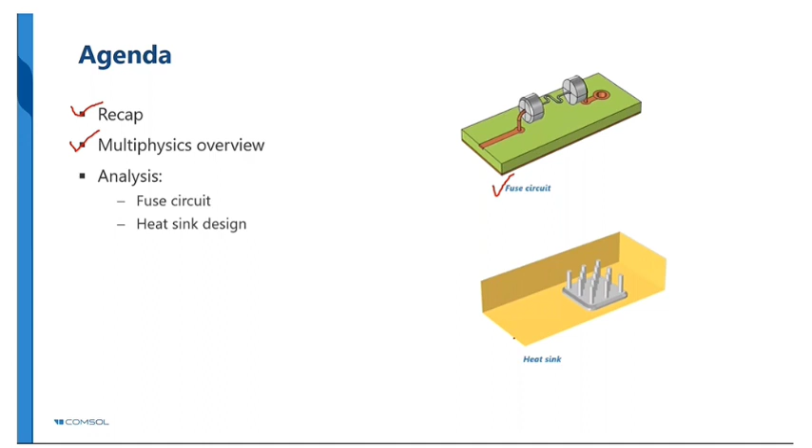So let us talk about the agenda of today's session. So the first thing is we'll go through some of the recap. We have already shared you the COMSOL Learning Center videos. So we highly recommend that you go through those videos because that will help you to learn the basics, so that when you come over in the session for the training, you would be able to perform the analysis. And we will give some introduction to how to do multiphysics analysis. Both the examples that we will do today, fuse circuit and heat sink, are based on multiphysics analysis.

So these are some of the prerequisites that we expect you guys to do. Watch these videos, CLC videos. These have been already shared with you. So I will suggest that if you have not seen them today, by today night, or by tomorrow early morning, you can do this, and you can ask more questions during the one-on-one session tomorrow. So these are the part of the recap that we have already shared with you guys.

Okay, so let me give you the brief introduction to COMSOL Multiphysics. With COMSOL Multiphysics, you can individually perform the physics like electrical, structural, acoustics, fluid dynamics, heat transfer, or chemical. In addition to it, you can perform coupled physics. For example, you can couple electrical and structural mechanics, or you can couple electrical with heat transfer. So there is no limitation on the maximum number of physics you can couple. So you can couple n number of physics together.

There are inbuilt physics interfaces available which perform the multiphysics coupling, but in addition to it, you can also write your own manual coupling approaches. You also have the equation based interfaces where you can write and solve your own equations in addition to the pre-built equations of each and every physics. You can also perform optimization, let it be shape optimization or geometry optimization. You can also couple your model with any third-party tools such as MATLAB, Excel, CAD tools like SolidWorks, AutoCAD.

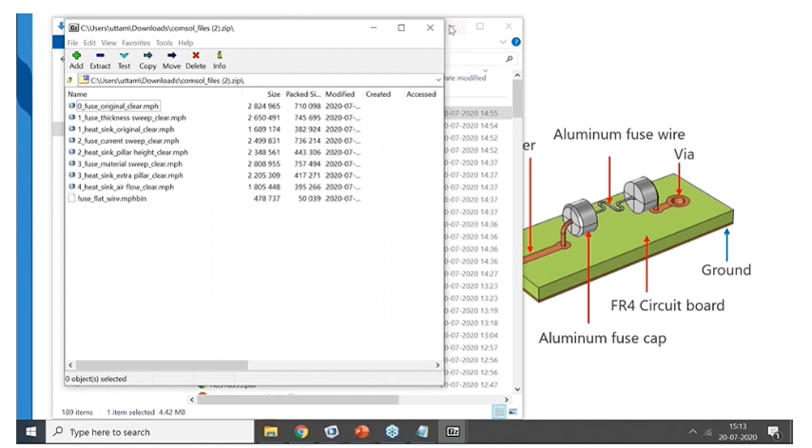You can see in your GoToWebinar window, there is a handout section. In that handout section, you can open the model files .pdf. Just click on that model files.pdf, and once you open it, there is a zip file, and once you download the zip file, there are around 7 to 8 model files available. Okay, and once you download the zip file, it will look like this. So this is the zip file contents, right?

So you need to use this fuse_flat_wire.mph bin file. So we're going to use this mph bin file. So can you just download the handout section and just unzip the files so that you have this fuse_flat_wire mph bin file with you.

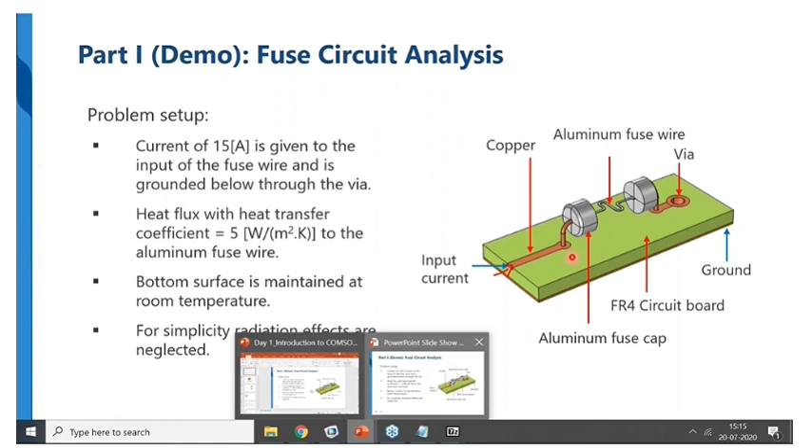And then, as you already know and have already answered, there are three physics that we are going to solve, or just two physics to start off with: electric currents and heat transfer in the fuse wire. So in that case, what we will do is start this process step by step.

We will only run electric currents first. We will see the currents within this system, and once we are confident of the results with the electrical circuits, we can then go ahead and couple the losses into the heat transfer part. So let us go to AC/DC, Electric Fields, and add the Electric Currents interface.

Okay, just click on Add. So we'll wait a few seconds for you guys to add the geometry, that is the 3D geometry, and then the Electric Currents interface. Let me know if you face any concerns till now.

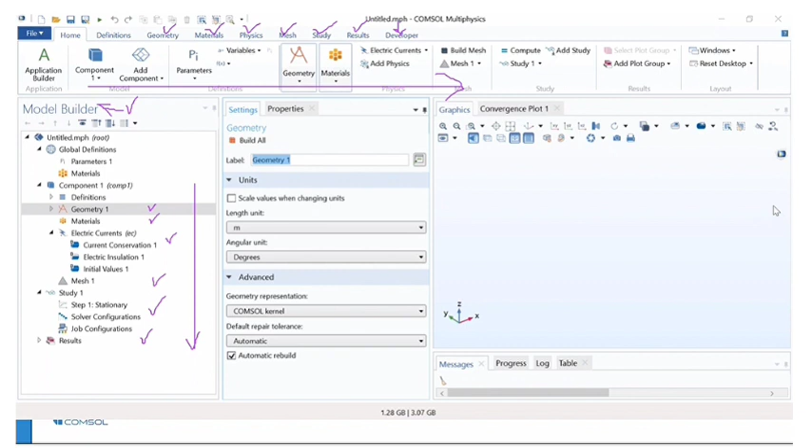So right now, you guys have not opened any files. You just need to open COMSOL Multiphysics and follow the model wizard steps.

Go to file, new, model wizard, 3-dimension space. I use AC/DC, electric fields and currents, electric currents. Go to study, stationary study, and that's it. So we have not added any file as of now.

Once we complete the model wizard step, the first thing we need to do is add the geometry first.

So how do you add the geometry? If you have skipped some steps, I suggest you go through the recording because this session is completely getting recorded. So the first thing is to add the geometry. What I will do is right click on Geometry 1 and click on Import.

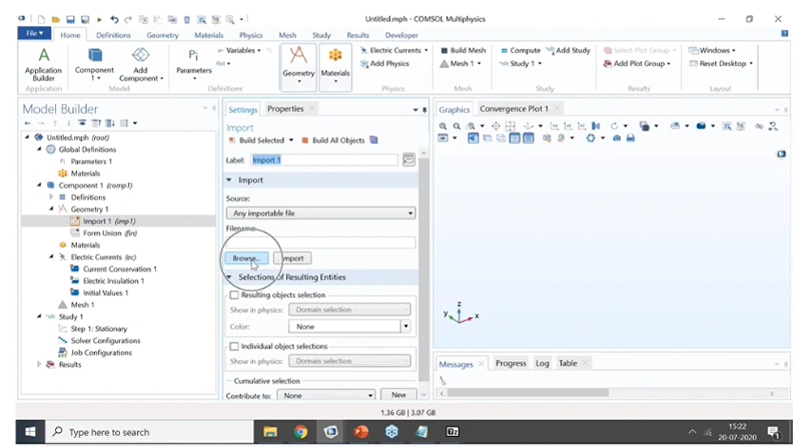Over here I can just click on Browse and select the model file. This is the model file, fuse_flat_wire.mphbin. Double click on this - it's available in the link we shared with you - and click on Import. I will wait for a few seconds for you guys to add or import this geometry.

There are a few questions like how is this geometry made. This geometry is made in COMSOL only, but to save time, we are not going into the steps involved in making the geometry. We are just trying to import the geometry and do engineering analysis. Day one is to have a glimpse of COMSOL Multiphysics, to get the flavor of how to do multiphysics analysis in COMSOL.

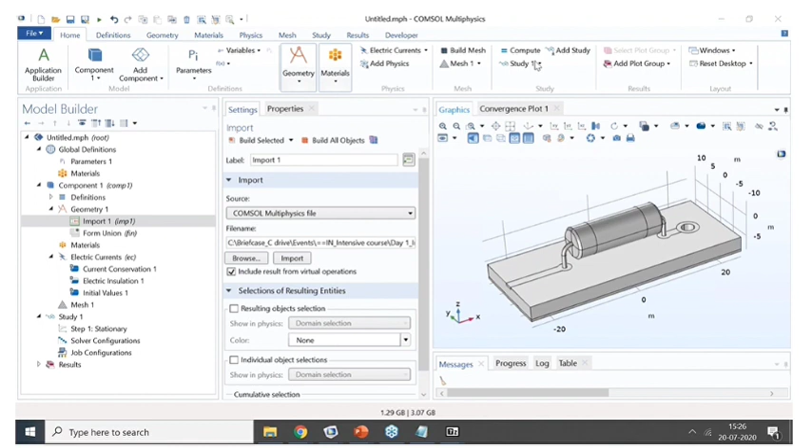Now, for example, you want to select some domain or boundary within this geometry, which are internal boundaries. For that, you just need to make this wireframe rendering, then point your mouse on top of it and use the scroller. Usually you put your mouse on top of it like this, and then use your scroller to move further - like this, you can actually choose any boundaries which are internal boundaries, not external boundaries.

Either you use the scroller, or you just point your mouse on top of the domain you want to select and use your up and down keyboard buttons, like this, and then whichever boundary you want to select, just left click on that. This is how you need to select the internal boundaries.

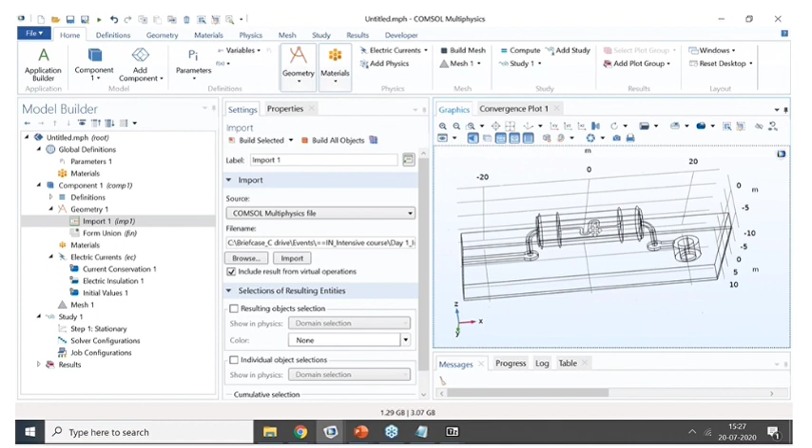This is not required as of now, but there was another question. If you right click on the geometry and move, you're able to pan your geometry, as you can see. If you left click on the geometry and move left and right, top and bottom, you're able to rotate your geometry. If you press your scroller button and move forward, you're able to zoom in, and if you move back, you're able to zoom out. So these are the three basic functionalities of using the graphics pane in COMSOL.

Let me know if you're facing any issues doing any of this. I'll wait for a few seconds for you guys to get a hang of it. So if you just left click on the graphics pane and move forward and backward, right click on the graphics pane to move or pan, and then use the scroller to move forward and backward.

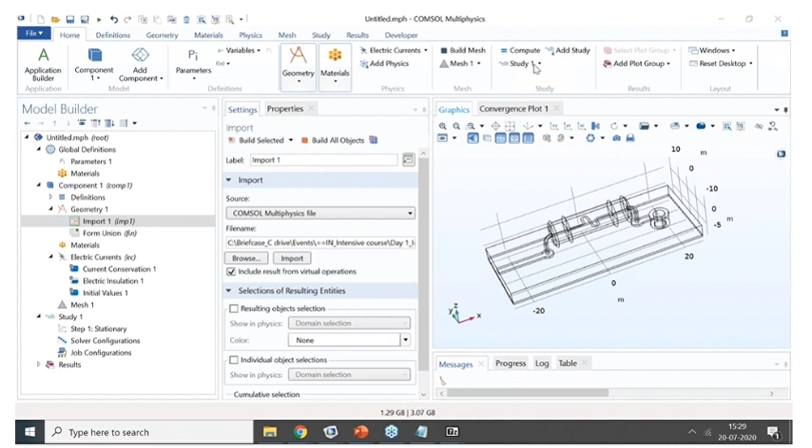How to select individual domains? I will come to that in some time. Selecting individual domains, individual boundaries, everything, how to select them. As of now, you can just learn how to move your geometry back and forth, move forward.

For people who are stuck at the geometry, just right click on the geometry. Once you're able to complete the model wizard, right click on the geometry and import. Once you click on import, go to browse, choose this fuse_flat_wire.mphbin file, double click on it, and then click on build all.

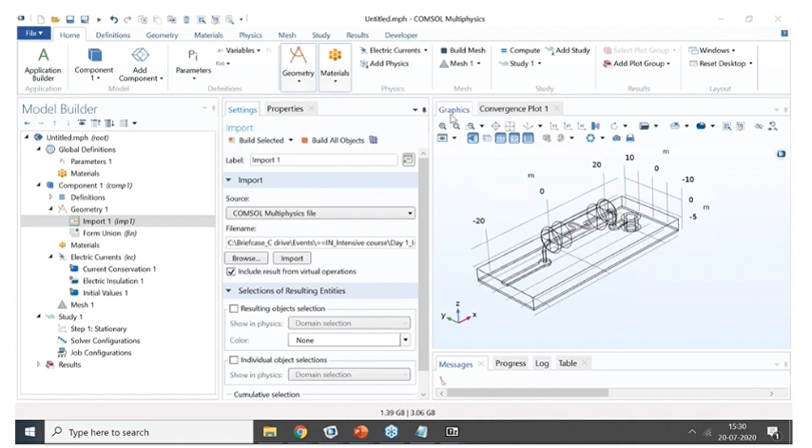So now the thing is, if you zoom into this boundary of the aluminum, it is only a boundary. So I want to now extend this boundary using the extrude operator. So how do I do that? Just right click on the geometry.

There's one more thing that I need to do. If you left click on geometry one, the length unit, you can see that it's in order of meters. You don't have a fuse wire which is in order of like 50 meters. It's from -20 to +20, around 40 to 50 meters. So you need to change the length unit. Just left click on geometry one and change the length unit from meter to mm.

I'll wait for a few seconds for you guys to do this. Change the length unit from meter to mm, and then build all. You see that your dimensions are now in order of mm. If you have missed any of the steps, you can see the recorded videos that we have. Once you are done with changing the length unit from meter to mm, the next step is to extrude your geometry.

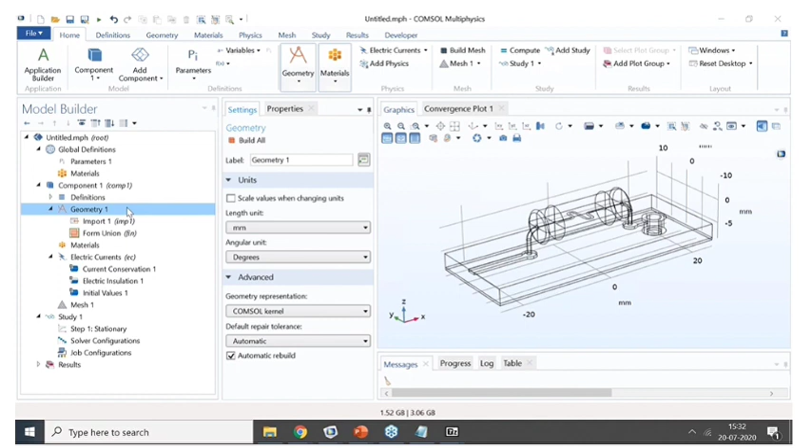I hope you have changed the length unit from meter to mm. Now just right click on geometry one and click on extrude operator.

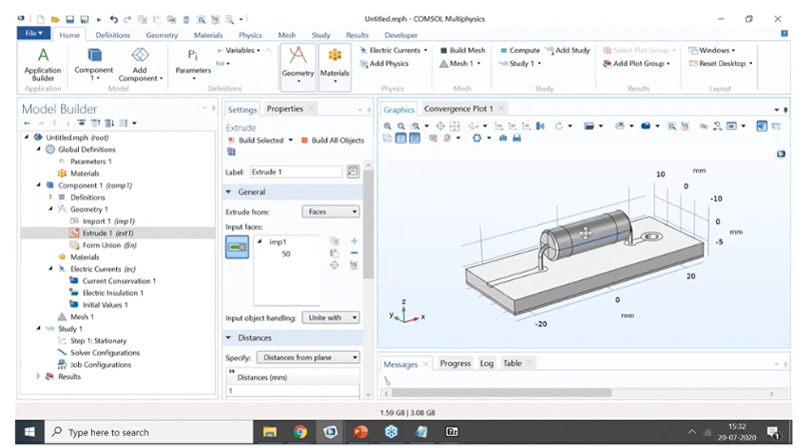And then you choose this boundary over here, just left click on this boundary. For this you need to enable the wireframe rendering. If you don't enable wireframe rendering, you cannot select this domain or boundary. Just enable the wireframe rendering, and then select this boundary over here. How do I select it? I just use left click, that's it.

And in the distance over here, I write 'thickness'. If I write thickness over here, this is going to give me a red symbol. So I will go into the parameter and write thickness equal to so and so mm. I'll wait for a few seconds for you guys to use this extrude operator.

I think you have added this extrude operator over here. This parameter thickness, I'm going to write in the parameter one as again the thickness, as 0.1 mm. While you define the parameter, the name remains the same, the expression is like 0.1 mm. That is 0.1 is the absolute value of the thickness, and the square bracket is the units. The units are always written in square brackets.

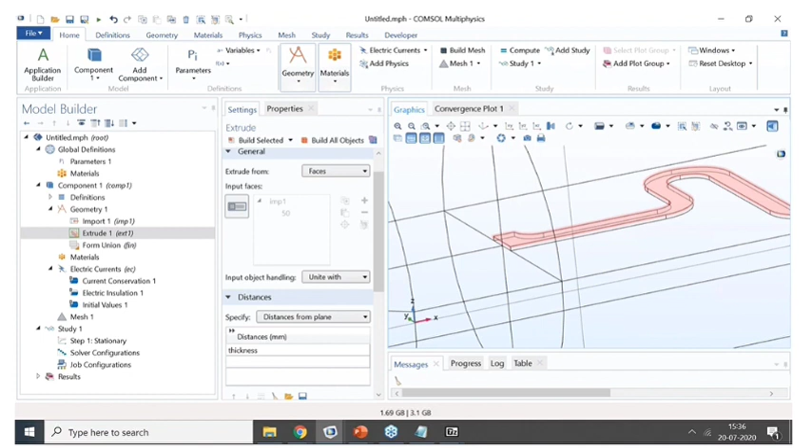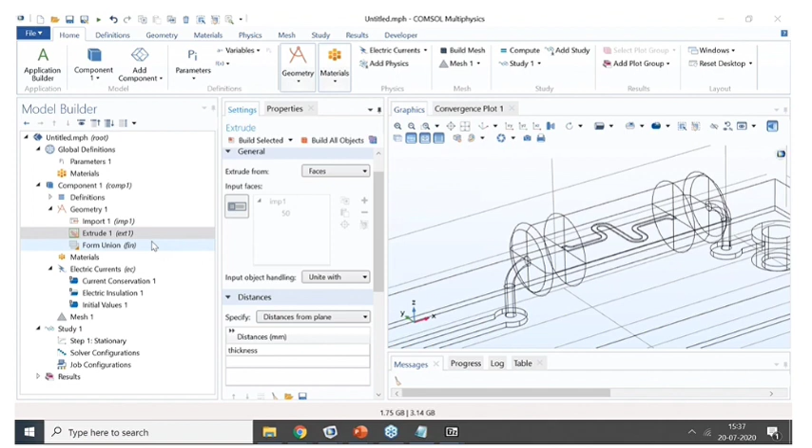So let me know if you are able to do this step. Any concern, any issues if you are facing to do this step. Wait for a few seconds for you guys to add this extrusion. Let me know if you're able to perform this extrusion, any issues are you facing, if you're able to extrude this boundary.

Uttam, sorry to interrupt. There are quite a lot of people who are not able to do the extrude operation. Can you please repeat it? Yeah, yeah.

So what I will do, I will just delete this extrusion. Now I go to the basic, that is only a boundary. To extrude, I just right click on geometry one and click on extrude. So once I click on extrude, I need to then select which face I want to extrude. So I just select this face.

And once I select this face, the distance I need to mention is the thickness that I have mentioned, the parameter as 0.1 mm, right? And then I click on build all. I'll wait for a few seconds for you guys to add these steps.

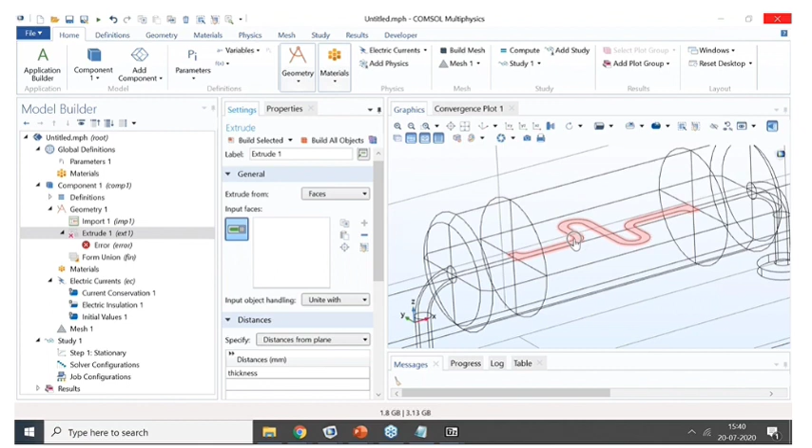So if you don't select any of these boundaries and click on build selected, then it will ask you to provide input entities. In that case, you need to enter this face. Just make this selection button on, click on the face that you want to extrude, and then just click on build all.

Once you've written thickness over here, you need to also write the thickness in the parameter section: thickness 0.1 mm. So let me know if you're able to add this extrusion, and any issues you are facing, so that we can proceed further.

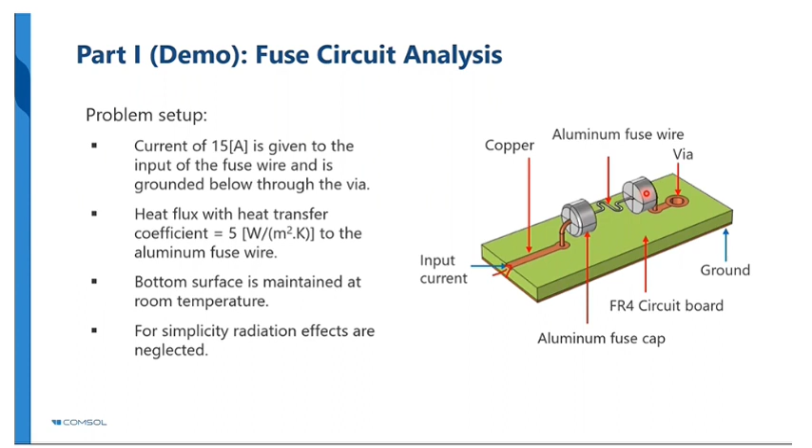Yeah, looks good. Many people are able to add this. So now the next thing is to add the materials. You can see that the copper is made of these domains, then you have dielectric in the center domain, and then this is the aluminum domain. The first domain that you add to your geometry is the domain which has the maximum number of elements. In this case it's the copper.

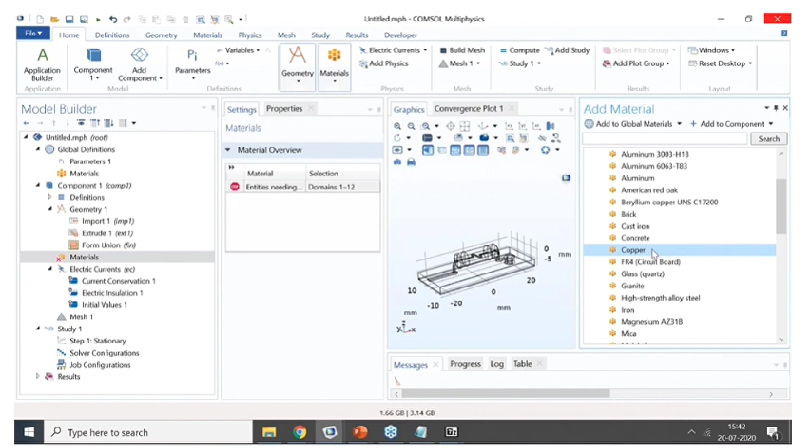So just right click on the materials, add material from library, go to built-in, and go to copper. Just double click on copper, and you will see that all the domains have been assigned as copper. That's what we want as of now; we will see what to do next. We'll wait for a few seconds for you guys to add this.

Once you've added copper, the next thing is that you need to add the aluminum fuse wire. Just double click on aluminum, and once aluminum is added, select these three domains. To select the inner domain, you cannot just left click on it, because the outer domain will get selected. So you need to move your scroller forward and then left click.

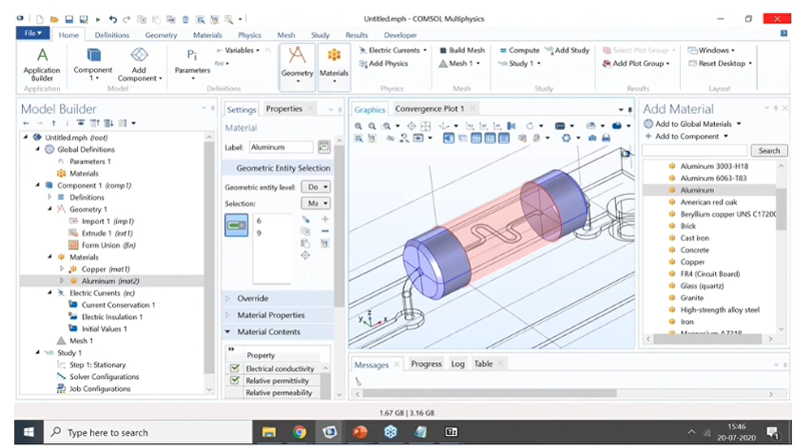So I will show this again. I will just remove all the domains. First, click on the left domain, then on the right domain, and then put your mouse on top of the domain you want to select, and use your keyboard up arrow to move forward and backward. You need to use the wireframe rendering, please do not forget that. Use the up and down arrows of your keyboard, or roll your scroller forward or backward.

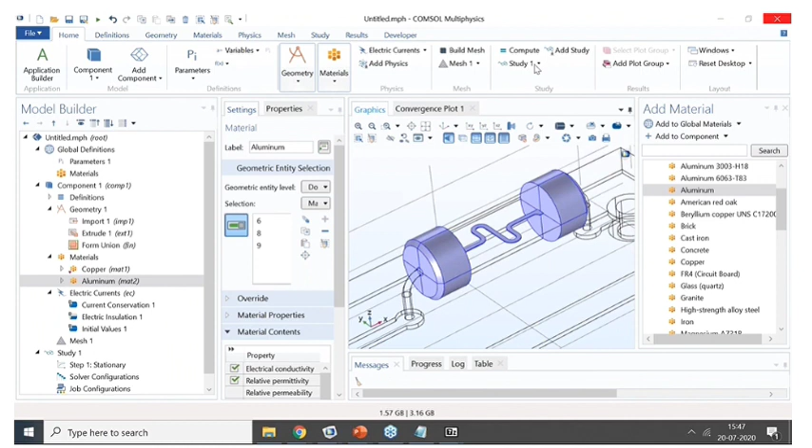Red means that it is yet to be selected. But if you click on it and hover your mouse on top of it, and it's showing green, that means the domain is selected. These three domains are selected. Let me know if you're able to add this aluminum domain, any issues or concerns, so that we can proceed forward.

So one of the questions is, we have already assigned the copper domain to 6, 8, 9, and we are now assigning aluminum to this. Is the copper domain being overridden? Yes, it is. If you go to the copper, you see over here 6, 8, and 9 are being overridden.

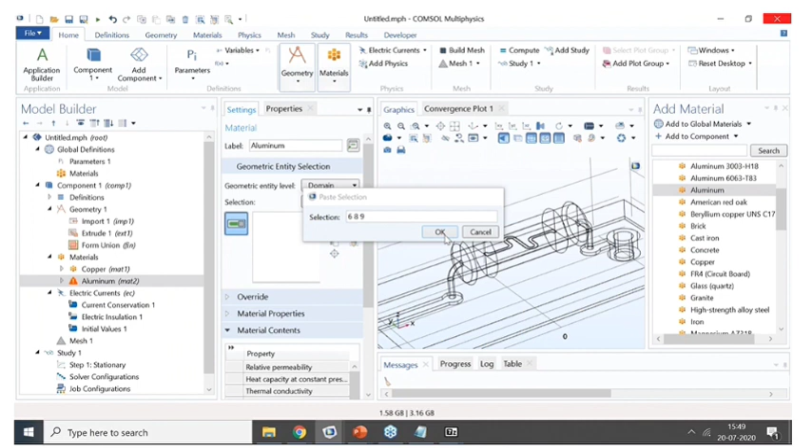One more way to select this domain, if I click on clear selection, if you are still facing concerns selecting the domains, is to click on paste selection and write the domain numbers 6, 8, 9. Okay, looks good.

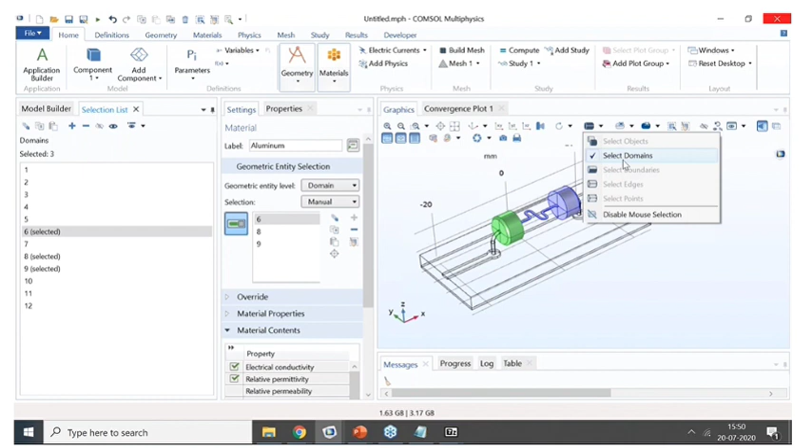One of the questions is, how do we know these domain numbers? Go to home, and on the right side there's a Windows section. In the Windows section, click on selection list. In this selection list you can go to domains, boundaries, and edges, and you can see that all the domains are numbered. You can choose whether you want domains, boundaries, or edges. Okay, looks good.

So now I have assigned the copper domain and the aluminum domain. The next thing is the dielectric domain. So I just right click on the air domain, add material from library.

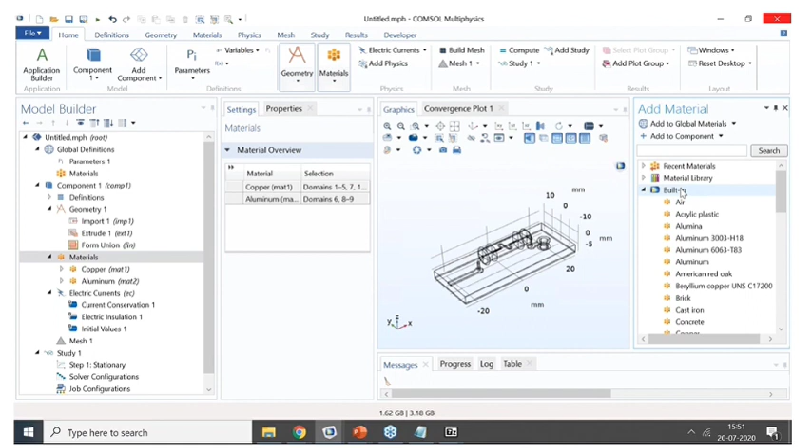And I go to built-in, and I select the FR4 circuit board. Okay, so in the built-in, all the materials are available. You don't need to search anywhere else. In the built-in, go to FR4 circuit board. Just double click on this and select the domain.

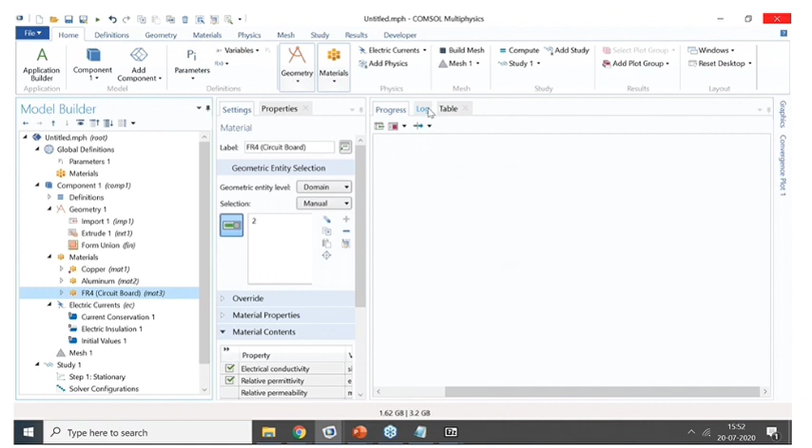Okay, so I hope you're able to add this FR4, and at any time if you have misplaced the location, for example, you might have done something very terrible to your COMSOL, so it might have gone something like this. If you're new to COMSOL, there is a tendency that it might go like this. You don't need to worry, just go to the home and click on reset desktop, and hopefully it should go to the original positions like this.

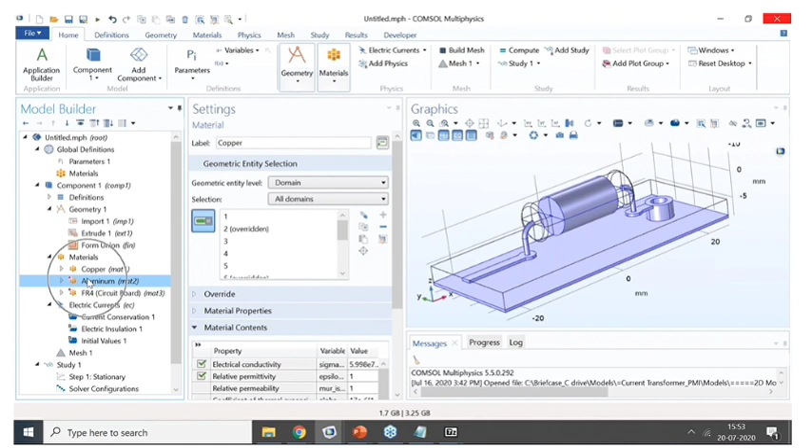Okay, so I've defined the copper domain, aluminum domain, and FR4. I hope you guys are done with the material section. Let me know so that I can proceed further with the electrical physics. Okay, looks good. So people are able to do the steps.

So the next thing is to add the electric current interface. To do that, I just go to my PPT and see what I need to apply. So I need to apply the current over here, and I need to withdraw my current in the bottom, right? So can you guess which boundary condition do I need to use in electric currents if I want to apply the current in this boundary? Any guesses? If you have already worked with COMSOL a little bit.

Yeah, so if you use potential, then you would be only able to apply the voltage. So here you need to apply the terminal boundary condition. Exactly. So let us right click on electric currents and use terminal boundary condition. And then just select this particular boundary. Boundary number 8. Okay.

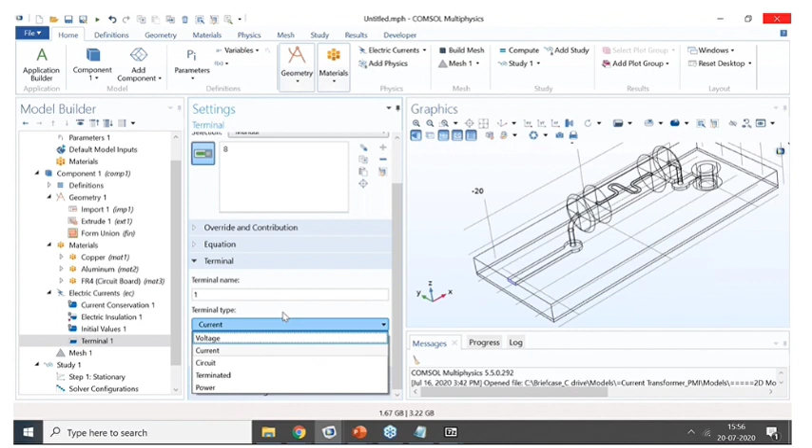We have one more question as to what boundary current source means. We usually use boundary current source for tangential flow of currents. For example, there is a surface, and on that surface you want in-planar currents to be present. In those kind of applications, we use boundary current source or current density on that particular surface. But in this case, we want the flow of current to be normal to this surface, so we apply something like this. So I go to terminal type, use current,

and over here I write it as I naught. So I parameterize my current. This parameterization is very important when you're trying to do the design and analysis of the fuse wire. You can think of yourself as a fuse design engineer, with an engineering design problem in your hand, and you just parameterize your current. So you don't write the absolute value, but the parameter that governs that particular current.

Okay, so I write I naught, and this same I naught I define in the parameters as 10 amperes, writing the unit in square brackets. That's very important. So I'll wait for a few seconds for you guys to add this parameter.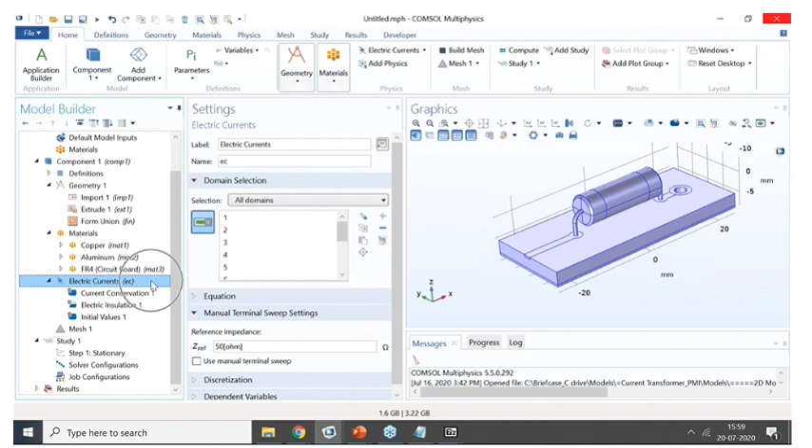Yeah, so there's a question on adding terminal. So I will just delete both of them and try to add both of them. So I just right click on electric current interface and I just click on terminal boundary condition. Okay, and then I select this particular boundary. Okay, in this I go to current and just write I naught. That's it. I'll wait for a few seconds for you guys to add terminal.

You can manually also add this using paste selection. Okay, so you have added this I naught in the parameter also, I naught as 10 amperes. And then I just right click on electric current and use the ground boundary condition. Okay, use the ground boundary condition and apply it to the bottom boundary.

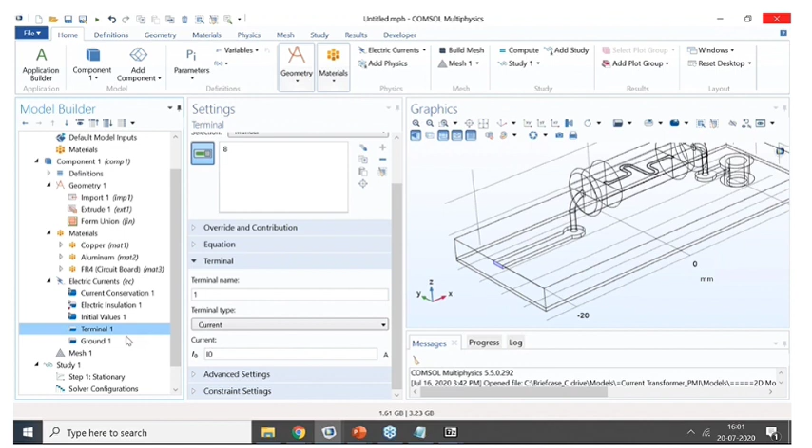Okay, or you can just enter. So just click on the broom symbol over here, clear selection, and enter the boundary 8 if you are facing difficulty to select this boundary. Okay, just select this boundary. Okay, so this is how we apply the terminal boundary condition in the top, and in the bottom we use the ground boundary. Okay, one more thing is that I hope you're able to complete this step, terminal 1 and ground 1.

If you see the electric currents over here, you need to remove this domain. Okay, so just hover your mouse on top of it and remove this particular domain. Okay, that is domain number 7. Okay. This domain you don't want because this is the air domain. So this is specifically if you want to do some radiation analysis, and that time you need it. But as of now, you don't need it.

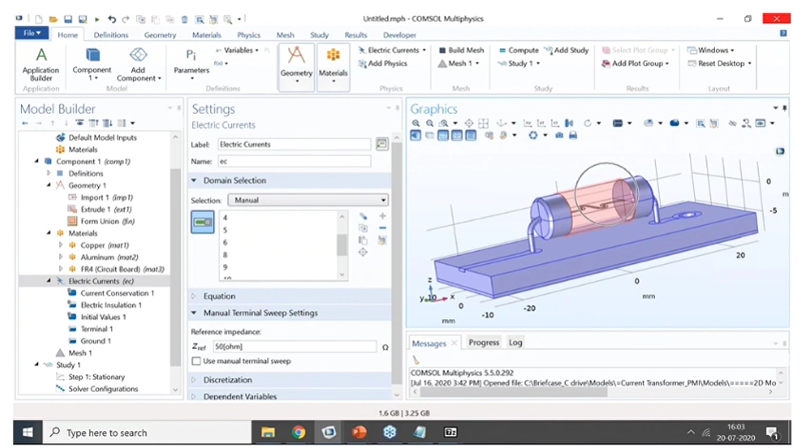So just remove this. So you just go to this electric currents and hover your mouse on top of it. It should be red color. Okay. So the air domain around that fuse wire is not modeled, but the aluminum itself is modeled. Okay, so I'll wait for a few seconds for you to remove this domain number 7, or you can manually also remove. So you just go to this 7 over here, just click on minus, remove from selection.

Yeah, you can also keep this 7 and add this air domain. You can also do that. Yeah, but we're not trying to model the radiation effects. We know that, or we assume that in the air the conductivity is almost 0, so we know that the current is not going to pass through the air, right? So in that case we try to remove this domain for simplicity, but at a later stage you might want to model with a very low conductivity. That also you can do.

Okay, but for simplicity we try to remove the air domain as of now, because we assume that the current is going to flow through the conducting domains. So if you see the conducting domains, they have the conductivity in order of 10 power 6 Siemens per meter, and air will have a conductivity in order of 0.1, 0.01 Siemens per meter. So a difference of around 10 power 7, 10 power 8.

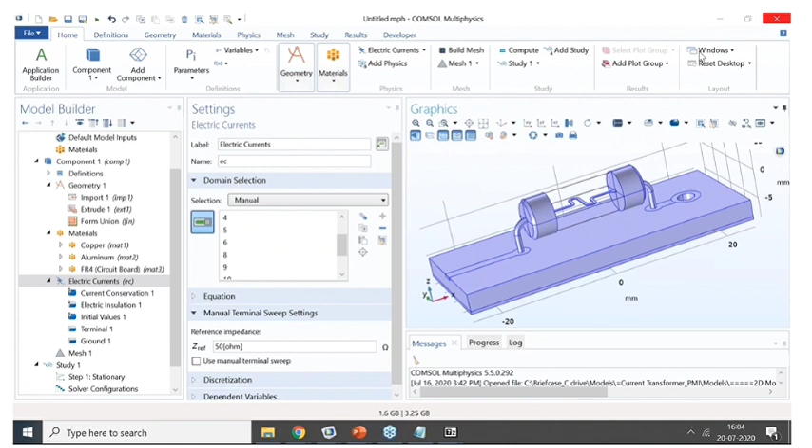Yeah, in the material section, it doesn't matter if you keep 7 or not. The thing that matters is which domains you selected. So if you have removed the 7 from here, you will also see that it doesn't matter which material you have assigned to the domain number 7. Okay, whether you have assigned it or not, it doesn't matter.

Yeah, so if you just go to this electric current interface over here, by default all domains would be there. Okay, so you just need to hover your mouse on top of this domain and just left click on this domain. So now it would be coming in red color. That's what you want.

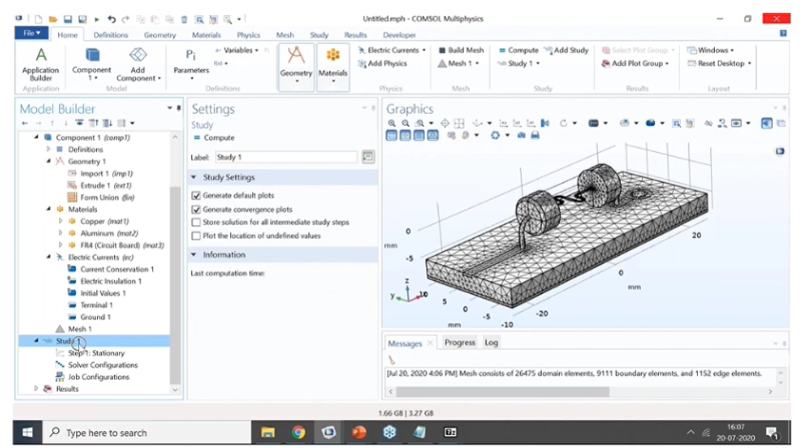Okay, looks good. So that's it. Meshing, just go to meshing and click on build all. As of now, we are not going to worry much about the mesh. We are going to learn more about the mesh in the meshing session day. As of now, this is an okay mesh to proceed. Just go to the mesh and build all. Okay, you can visualize the mesh if you want. I will just give few seconds for you guys to visualize the mesh. And then you can just go to study one and click on compute.

Yeah, so one of the questions is where this ground boundary needs to be applied. So the first thing is that you need to use ground boundary condition. Okay, and once you have added this, you need to apply it to the boundary number one, that is this one. This is below the terminal. Okay, so the people who have clicked on compute, are you guys getting the results? Okay, great. So some people are indeed getting the results.

So if you're getting an issue of undefined sigma property, then the case may be that you might not have assigned the material for all the domains. So please check whether you have assigned materials to all the domains or not, or some domains might be missing. Okay, so always check that in the first material that you applied, you select it as all domains.

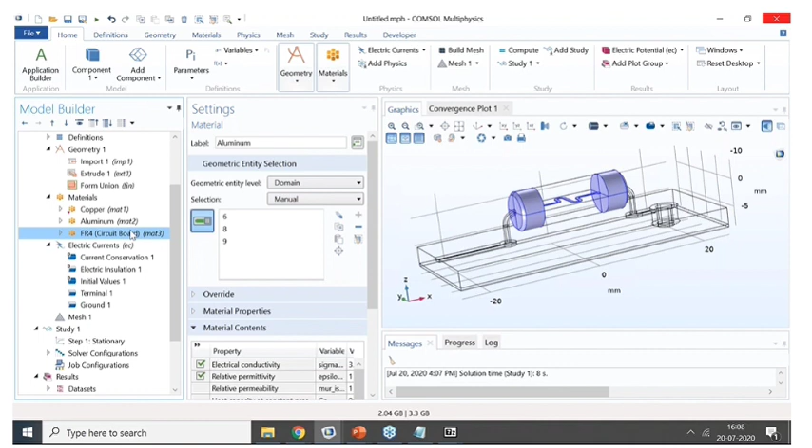Okay, in that case, at least some material would be assigned to all of the domains. Okay, and then you override it with the other domains, right? Otherwise you'll be missing some material properties.

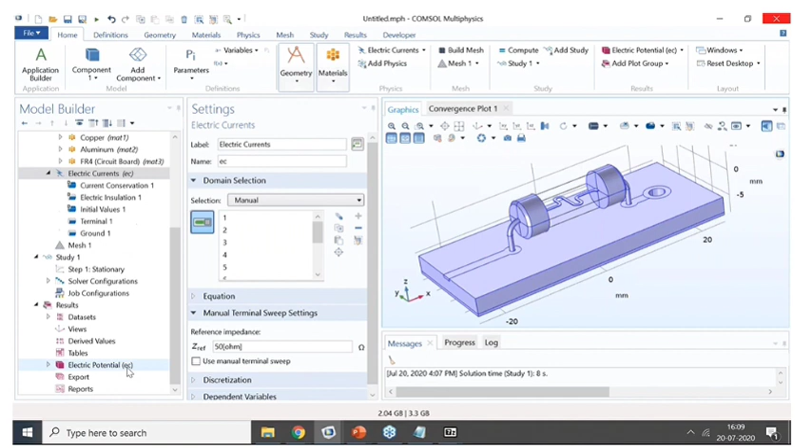Okay, so if you are getting the issue of undefined material, just go to copper and in the selection keep all domains. Okay, and then also don't forget to remove this domain, otherwise this will be working as copper. Okay, so you will not be able to see the losses once you post process the result.

Okay. So if you're still facing the issue, you can see the recording once more. We can proceed further.

So the next thing is, once you are done with the electrical physics, you want to couple the losses from the electrical field to the heat transfer. So it's very important to first visualize the losses in the electrical domain. Okay. So how do you do that? Just right click on the results, and just click on 3D plot group. Okay, so I've created a 3D plot group.

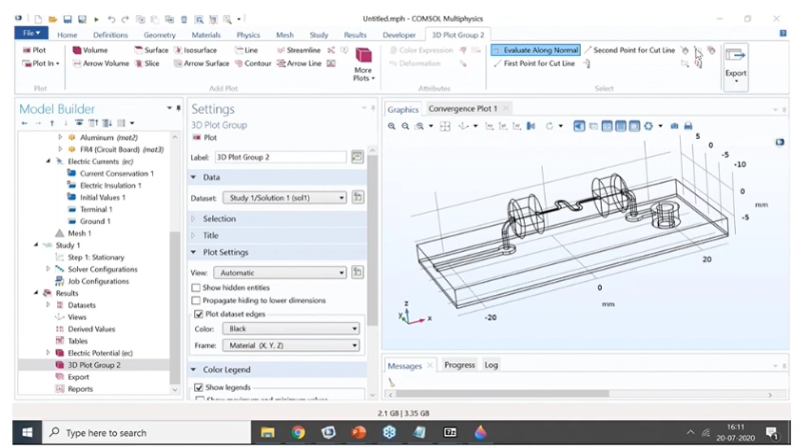There is one more question as to what is the significance of the meshing. So whatever geometry that you make in COMSOL, the solver is not going to take the geometry directly. The geometry is actually going to be divided into small elements. As you can see over here, these are volumetric elements, small domains, and then it is going to run the numerical method on this meshed geometry.

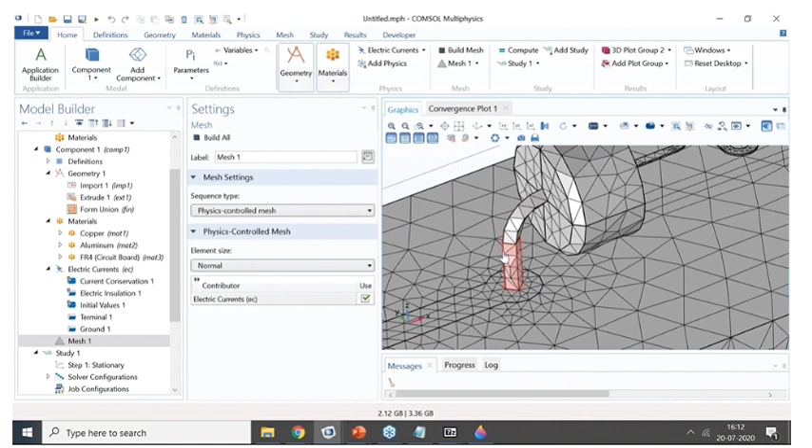Okay, so if your geometry has a circular wire, but your mesh is so poor that it makes it a rectangular wire, then your solution would be for a rectangular wire, not for a circular wire. Okay, so this is a little bit poor mesh, but that's fine. As of now, I want to show the flow of modeling in COMSOL, so that's what I'm interested in.

So you can just go ahead and make it finer at a later stage, but as of now, this should be fine enough. Okay, so after computing the results, that is study 1 compute, right? If this study 1 is not there, just go to the study, add study, and then add a stationary study.

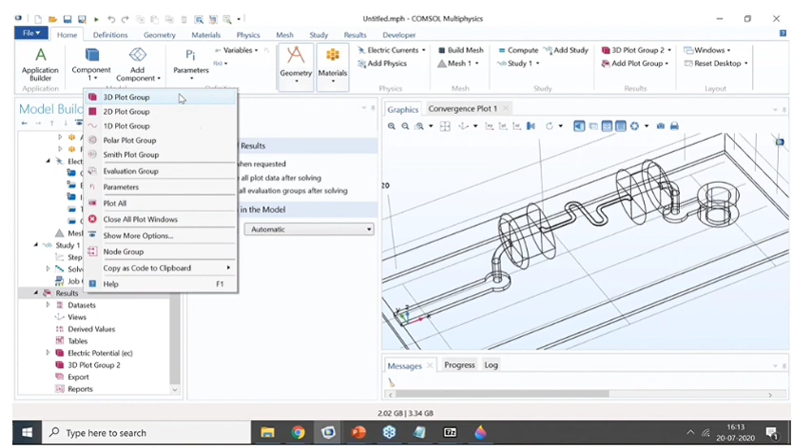Okay, so after completing study 1, what I do is that I want to visualize the losses in the aluminum fuse wire. So I just right click on the results, add a 3D plot group. Okay, in this 3D plot group, I just right click on the 3D plot group and click on volume.

Okay, in this I just write the expression as ec.Qrh. This is the expression, or variable name, for the losses. And if I click on plot, you will see the losses. Okay, so I will wait for a few seconds for you guys to add this volume and ec.Qrh. These are losses in watt per meter cube.

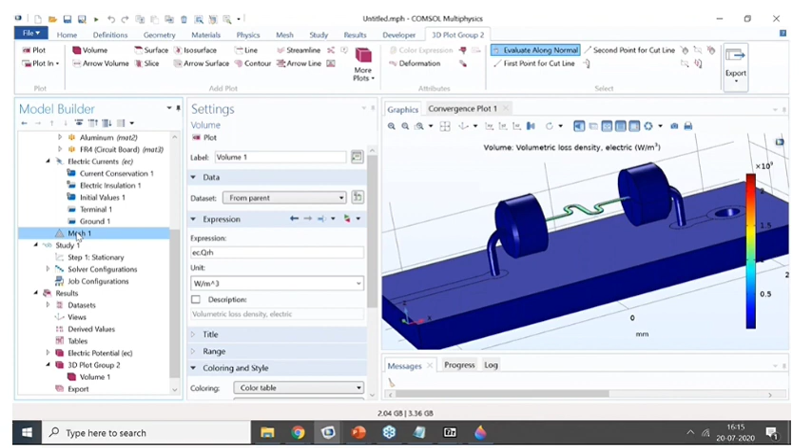One more question: can we see the structure after meshing? Yes. So if you see the mesh, if you just go ahead and make it more refined, like finer, you will see that it will become more circular. Okay, this is more accurate. But as of now, as people are having limited RAM or resources, I want to run the model quickly. Okay, so instead of finer, I use normal. That should be fine as of now, not a concern.

Okay, so I hope you're able to visualize the volume losses, Qrh. So now you want to know what exactly Qrh is, right? So just click on expression, and over here you search for losses. If you search for losses, you will see that this is volumetric loss density, electric, because there is no magnetic component as of now. So it's just the electric part. So whatever variable you want to search, you can just search over here.

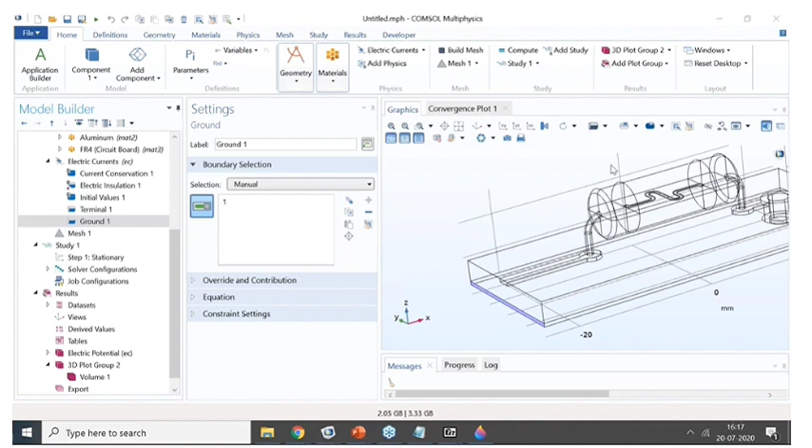Now the next thing is to couple these losses in the heat transfer interface. So how do I do that? Over here, I can just go to study 1. Here I can write electrical analysis, and that's what you should always be doing. You should always do the problem step by step. For example, your first study is to perform only the electrical analysis. The second study could be the electrothermal analysis.

So I just go to study 1. I change the label from study 1 to study 1, and in brackets I write electrical analysis. The next thing, I need to use the heat transfer. So I need to go to the physics, add physics, and over here I can add heat transfer in solids. Just double click on this.

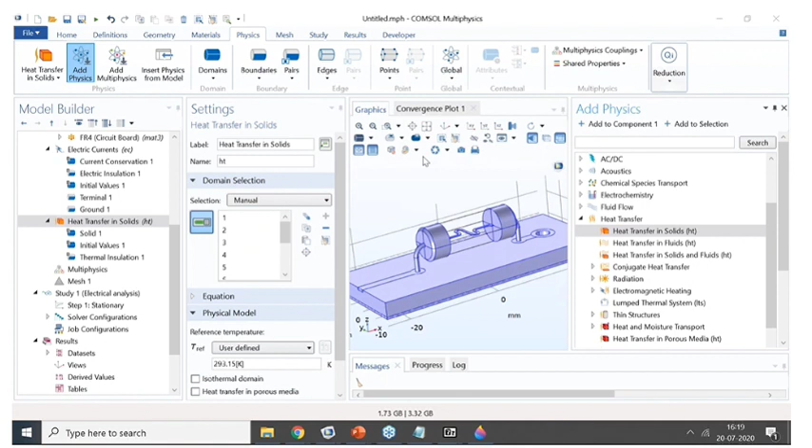If you want to see the internal equations, you can go to show more options and enable the equation view. This is a little bit advanced. In this equation view you will be able to see all the variables which are hardwired internally, like losses. QRH would also be mentioned somewhere over here. But as of now, I'm not going into the advanced level.

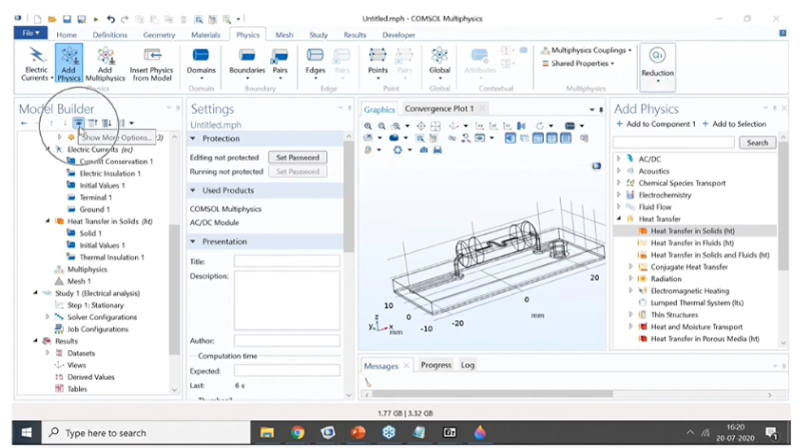Let me know if you're able to add the heat transfer in solids. Any concern, any issue? For equation view, you just go to show more options, the I button, click on equation view and click OK. Then you will be able to see the equation view.

Once you have added heat transfer in solids, you need to add some cooling condition, because I'm looking for a steady state answer, that is, at time t equal to infinity, what is the temperature of your system. To do that, I right click on heat transfer in solids and use the heat flux boundary condition, and select the upper boundary, boundary number 7.

Then I use the convective heat flux. I'm trying to have a cooling boundary condition, and I give a heat transfer coefficient of 5. So this boundary is getting cooled. Some kind of flow is happening on the top surface, cooling this boundary with a heat transfer coefficient of 5 watts per meter square Kelvin. I'll wait a few seconds for you to add this.

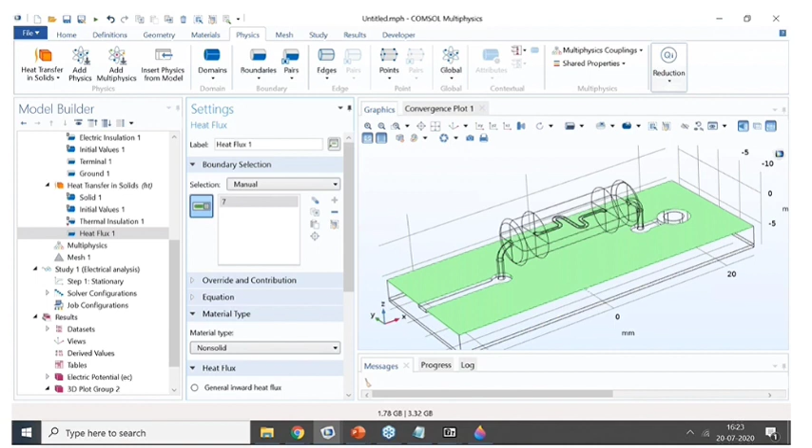There's a question as to why we use convective heat flux and not the general inward heat flux. We are trying to impose a boundary which will cool the system, so we use the convective heat flux. This is a cooling boundary condition. General inward heat flux is also possible, but then you need to enter a negative value. What people usually use is convective heat flux, meaning air is flowing around the system and cooling it with a heat transfer coefficient of 5.

I hope you are able to add heat transfer coefficient 5. So now you're heating your system and also cooling it, hence you can find a steady state solution. If you don't cool your system and only heat it using the Joule losses, you will not be able to find a steady state solution, that is, you cannot run the stationary solution. Now the system is getting heated as well as cooled.

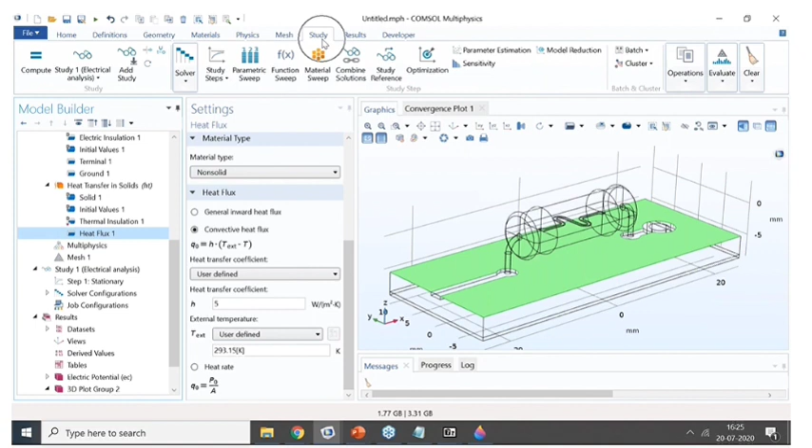Now I can go to my study, add study, and add a stationary study. Just double click on stationary. I'll wait a few seconds for you to add the stationary study. So go to study, add study, double click on stationary study.

Over here I run both electrical and heat transfer. I go to study 2 and write electrothermal analysis. The important part is that both need to be selected. By default, both of them would be selected.

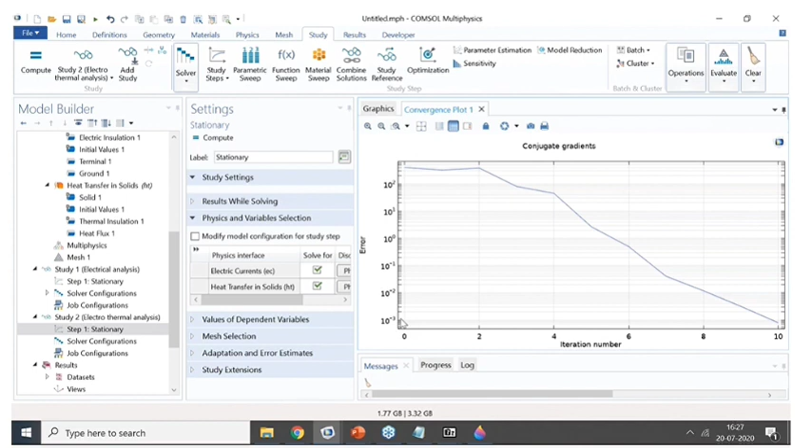So this is one more question on the convergence plot. The convergence plot signifies that your system is moving towards a constant solution, or it's able to find the solution. Usually it has a relative tolerance of 10 power minus 3, and if it goes less than the tolerance value, then your system gives you the actual results.

If you're using a Linux system, you just need to right click on the root node and click on Add Study. So that's it. Just go to Study 2 and click on Compute, and see if you're able to get a converged solution or not.

In the bottom you can see there are two system memory values. On the left side is the physical memory, that is the memory COMSOL is taking of your system. On the right side is the virtual memory, that is a way to know how much memory COMSOL is asking from your system. So this is what COMSOL is asking, and this is what your computer is able to give. If this virtual memory goes more than your current RAM limitation, then your system might be getting hung.

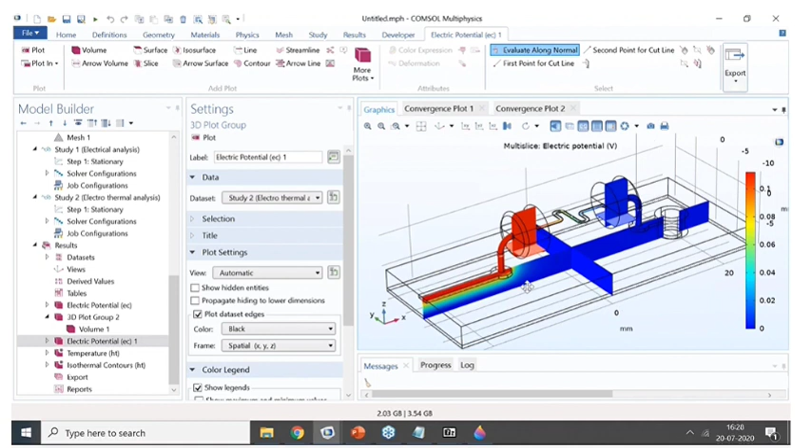Now I go to my electric potential, that is fine. However, in the temperature, I get just a constant temperature profile. So can anyone tell me what is the issue that we have? What is the issue present in the model right now? Why are we getting a constant temperature throughout the domain? Any guesses? Any intuition?

So we are getting a lot of responses, but not the correct response till now. So the heat input, have we mentioned it or not? Yeah, so that's what I'm looking for. The concern is that the coupling from the losses in electrical physics to the heat transfer in solid is missing, right?

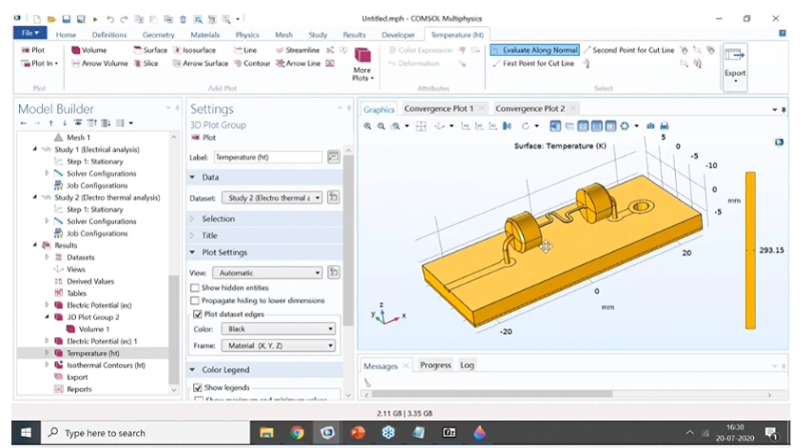So the multiphysics node is missing. If in your model you're able to see a constant temperature like this, that means the coupling is missing. You already saw that there were losses, right? The losses were in the order of 10 power 9 watt per meter cube, specifically very high over here. But then you're not getting any rise in temperature. That looks like a very big concern, right?

So in that case, you can troubleshoot that there is a miss of linkage between the electric currents and heat transfer. So how do I fulfill this? Just right click on the multiphysics node, and click on electromagnetic heating. That's it. I'll wait for a few seconds for you guys to add this.

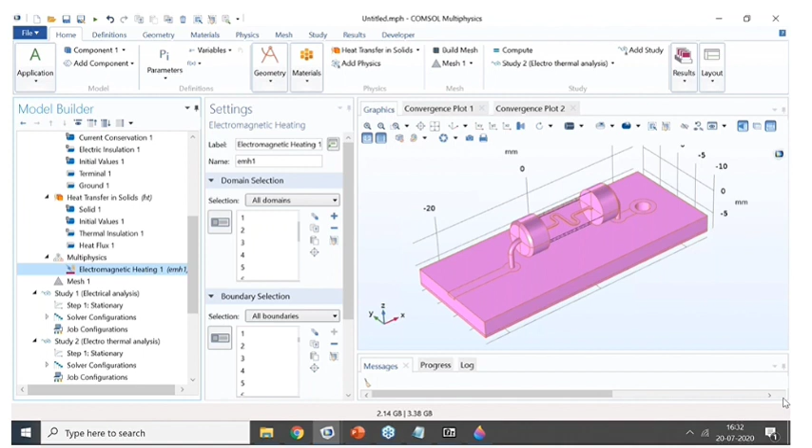Once you add this electromagnetic heating 1 and then go to Study 2 and compute, you should be able to see the rise in temperature. Yeah, so now you can see that there is a rise in temperature of your system, right?

Over here you can see there's a couple of questions. How do I know which option I need to select for the coupling? So over here, if you just right click, you need to couple the electric currents and heat transfer. Electromagnetic heating does that. So you can see over here, it couples from the electric currents interface to heat transfer in solid.

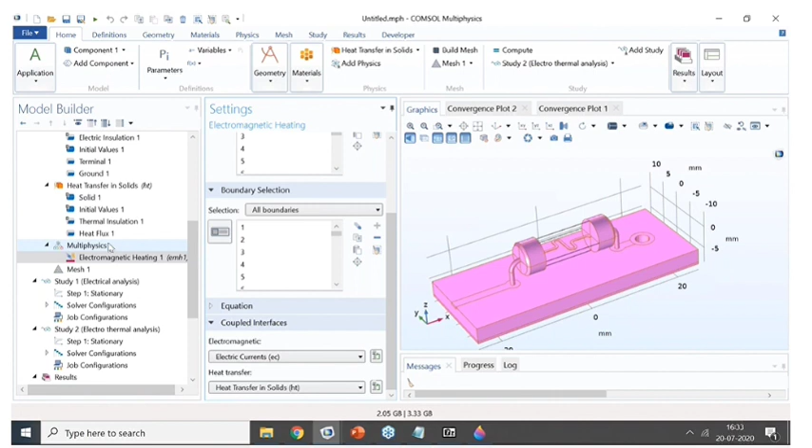For example, if you're looking for some kind of plasma application, then you use this one. If you are looking for some kind of Peltier effect or Seebeck effect, then you use thermoelectric effect. This option will come up when you have electric currents and heat transfer. If you have some other interfaces, then other options will come.

Okay, and the coupling as of now is one way only. That is, the losses in the electric current interface are responsible for the rise in temperature in the heat transfer. But if you want to back couple, like if there is a rise in temperature in your electric currents, does it affect the conductivity or not? In that case, you need to go to current conservation and then go to conductivity as linearized resistivity. I'm not going to go into that as of now, but this is how you can do it.

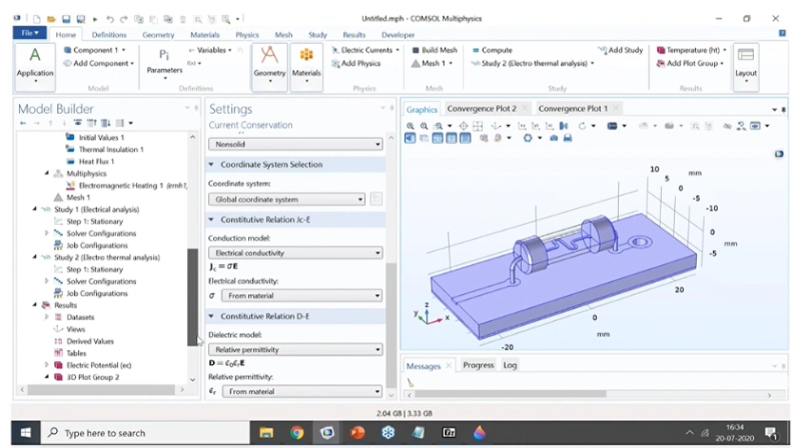Okay, looks good. So now you can ask a couple of questions once you are able to gain the temperature of your fuse wire, and that question could be like, what should be the maximum, what should be the minimum thickness of the aluminum fuse wire to sustain a current of 15 amperes.

So in this case, what will you do? Any guesses, any intuition? So the question is, what would be the minimum thickness of the fuse wire to sustain the current of 15 ampere? As a design engineer, what do you think you will do?

Yeah, so we are already getting very interesting answers. I'll wait a few seconds for you guys to give more answers, and then I will try to explain how to do this.

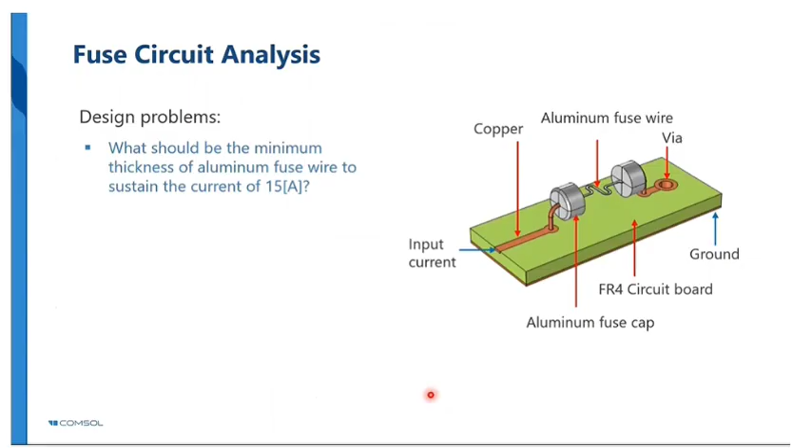And I change my range. So I just write the thickness, and by default it will come as thickness only. I can put it in the form of a range. As of now for simplicity, I will put it as 0.05, 0.1, and 0.15, and units as mm. This will solve my model quickly.

So only 3 parameters I'm going to run for. You just click on range. You can do it for a very long period of variation of thickness, but as of now, to quickly get the results, I'm going to use the thickness as 0.01, 0.05, 0.1, and 0.15. And that's it, just click on compute then.

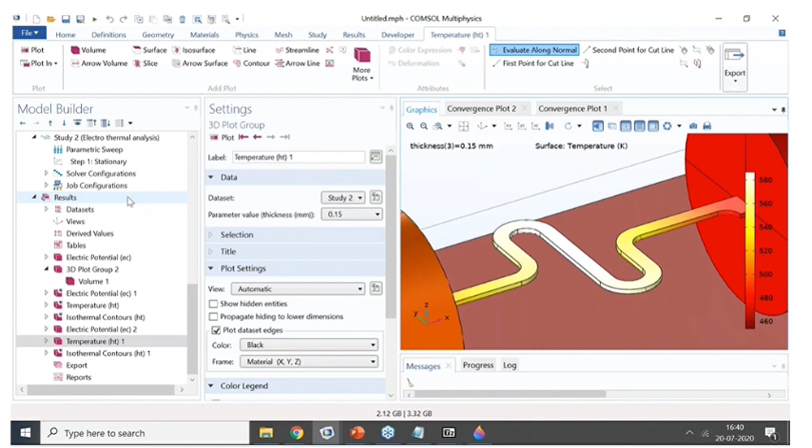Just right click on the results, 1D plot group. I go ahead, right click on 1D plot group 9, and click on point graph. Then I choose the point I want to evaluate, this point. You can choose, for example, this point 75 number, and expression as capital T. Don't forget to change the data set from parent to electrothermal analysis, study 2, parametric solution. Then select this particular point and click on plot.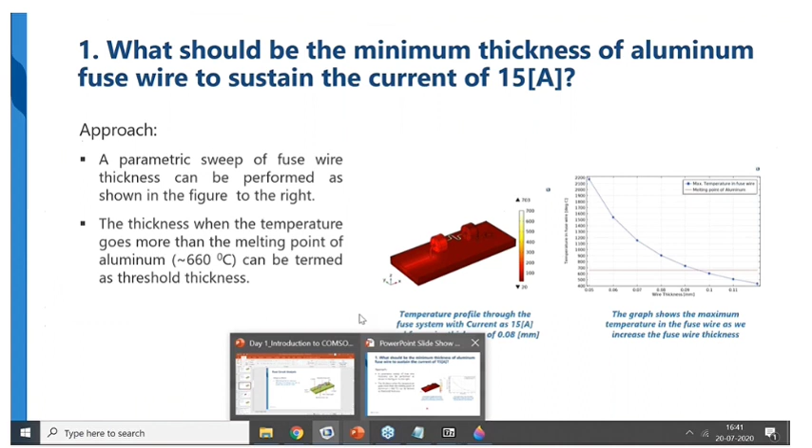So you can see that as the thickness is increasing, the temperature is decreasing. I will wait a few seconds for you guys to do this step.

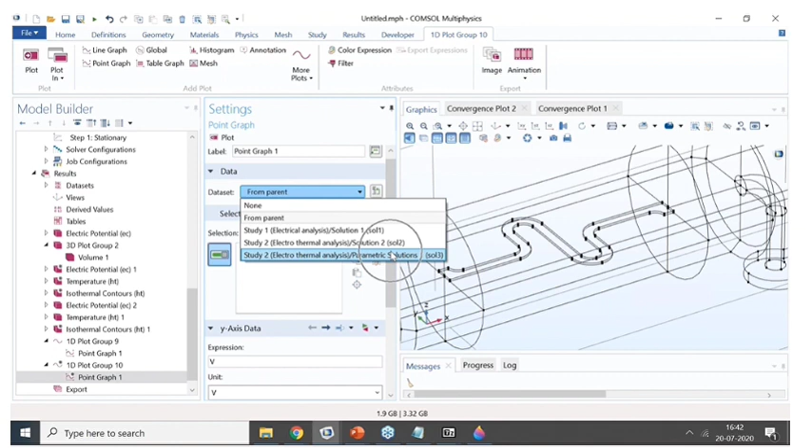I will repeat this step once more. I right click on the results, 1D plot group. In this 1D plot group, right click and click on point graph. Then go ahead and change the dataset from parent to study 2, electrothermal analysis, parametric solution. I select this particular point, and expression I put as capital T, and click on plot.

No concerns if you are facing some issues or errors. You can watch this video again so that you don't miss any points over here.

So the crux of what we were doing over here is the figure you can see. Can you tell me, what I did over here is the wire thickness is increased and this is the temperature. The red is the melting point of the aluminum. So can you tell me what has to be the most appropriate thickness of wire so that it doesn't melt at 15 amperes? Any guesses, any intuition from this graph?

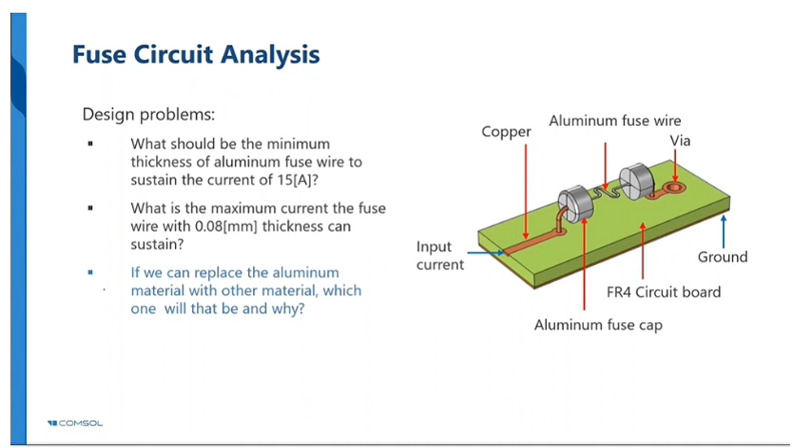The final question for this problem is, if we replace the aluminum material with some other material, which one would it be and why? So you can actually do some material analysis also. You might be having materials such as aluminum, copper, stainless steel, and you can come up with figures like this.

Here what you do is you try to again increase your current, perform parametric sweep of the current, and then try to see the melting point of your structural steel. So now if your appliance is working for around, the maximum operating current of your appliance is around 13 ampere. So in that case, which material will you use?

Any guesses, any concerns that you get? If your appliance has to work only till 13 amperes, not more than that, then which material will you use for the fuse wire? Any guesses, any intuition?

Yeah, so we will use the aluminum. That is because if you choose structural steel, it will always melt—it is more than the melting point of the structural steel. So even if you work with 5 amperes, the structural steel will melt. But we want the system to work till 13 amperes at least.

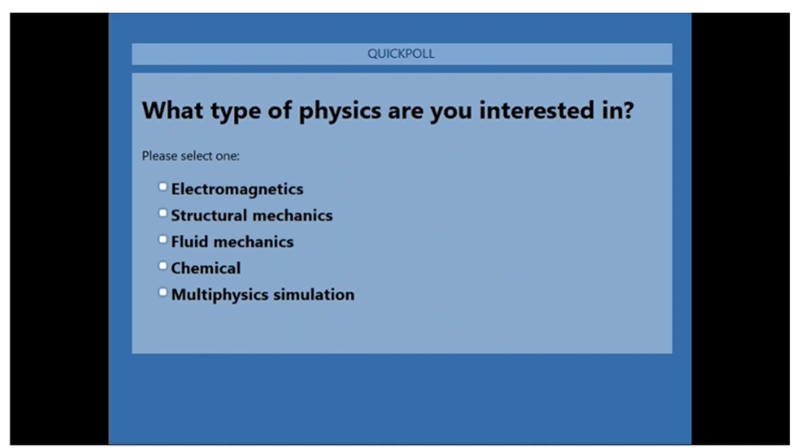So around 50% of the attendees are interested in doing multi-physics analysis. Around 10% each are electromagnetics, structural, and chemical, and then around 15% are fluid dynamics. So we have more than 50% actually interested in multi-physics application, and that would be good, especially for the next problem that we're going to discuss.

The first example also was multi-physics, and the second model is also on multi-physics. In this case, we have an inlet flow from here, and this is the outflow of the fluid. And there is an LED bulb—you can just imagine an LED bulb somewhere over here, which has a loss of around ten watts. And this is the heat sink on the top, and this heat sink is able to give out the heat to the surrounding.

So in that case, what we try to understand is how can you design your heatsink? What are the modifications that you can do in the heatsink to change the operation of your system? So there could be design questions, such as if the LED bulb is working for 20 watts with an efficiency of 50%, can you predict the hotspots? So how to predict the hotspots? It would be shown to you.

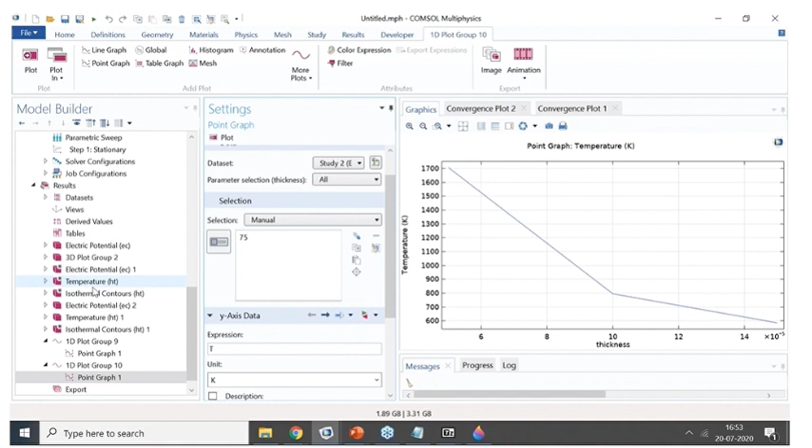So, for example, over here also, if you want to do the hotspot analysis, if you see the temperature or the losses, from this also you can get to know the hotspot.

Okay, so can you tell me what are the steps that you can do to make this heat sink more effective? Any guesses, any intuition? What modifications will you do to the heat sink so that it will not melt, or specifically where the hotspots are present, it will not affect those areas that much? I'll wait for a few seconds for you guys to give the response.

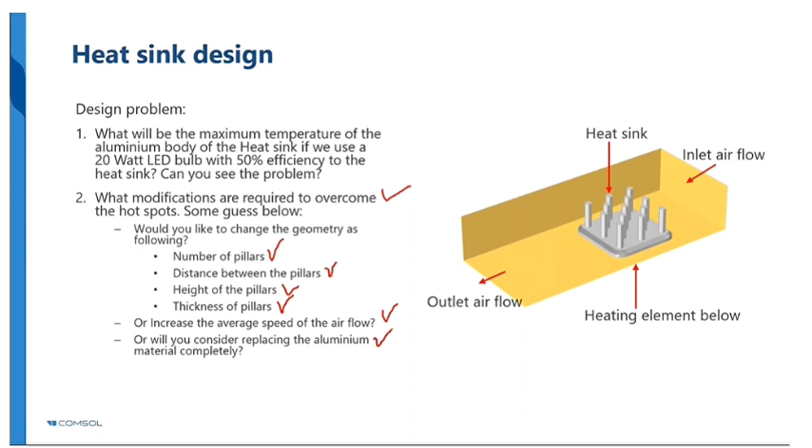Okay, so as we said, number of pillars is one of them. Distance between the pillars, that is the density of the pillars. So where there is a hotspot, let us try to increase the number of pillars, make it more dense. Height of the pillars, thickness of the pillars, or airflow. So you can increase or lower the airflow to see if there is some effect. Or replace the material property with some other material you can use as a heat sink.

Okay, so let us see the first option, right? That is detecting the hotspot. That is the first thing. We already know how to detect the hotspot. In addition to it, you can also use max min temperature. For example, if you use the temperature plot over here, just right click on the temperature plot and use more plots, and you can use max min volume.

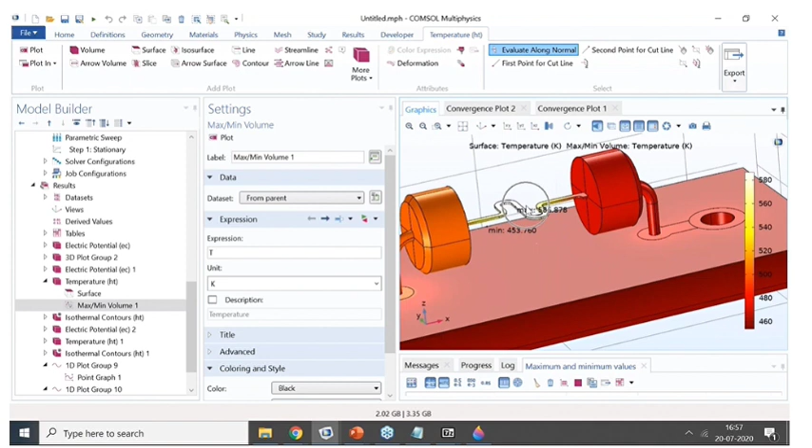Okay, with this expression as temperature, you will see where the maximum and minimum temperature is, right? So you can see the maximum temperature is somewhere over here. Minimum is somewhere over here. You can also see the average temperature of this particular material. To do that, just right click on derived values, average, volume average, and this would be required especially in your assignment today, how to evaluate the average temperature or maximum temperature. So I can also go for volume maximum and choose which domain you want to select.

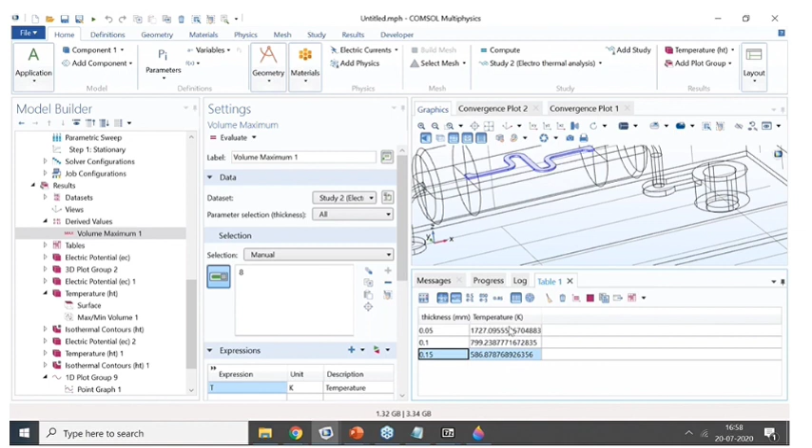Okay, so I choose this domain for example, change my data set from study 1 to study 2, and write my expression as capital T. And just click on evaluate. Okay, I need to choose this domain. If you change the data set, this domain goes away. So just make sure this domain is there once you change the data set, then click on evaluate. So you can see the max temperature for all the thicknesses over here. Okay, looks good.

Okay, so once you know where the hotspot is, the next thing is to see the type of solution that you can provide. One of them could be extending the pillar height. So you have the pillar, and you try to extrude the surface of the pillars. That could be one of the solutions, right? So if I do that, I get a figure like this: average temperature in the heatsink versus extension of the pillar size. Can you tell me what has to be the best extension of pillar height, after which what will happen? Any guess, any intuition?

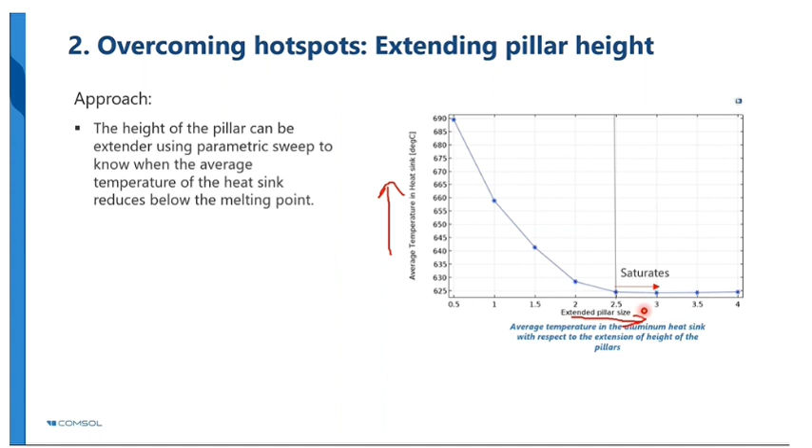Yes, definitely 2.5 is the best one, because after that the temperature saturates. So even if you try to have around 3 mm extension, the average temperature remains the same, so it doesn't matter then. After 2.5 mm it doesn't matter whether you have it for 3.5. Then why do you want to waste your material, right? Even 0.5 mm of material for very large manufacturing might be a cost for you, right? So in this case, 2.5 mm is the best extension of pillar height.

The next thing could be increasing the number of pillars. So I know that my hotspot is somewhere over here. So how about having an extra pillar over here, or having an extra pillar over here?